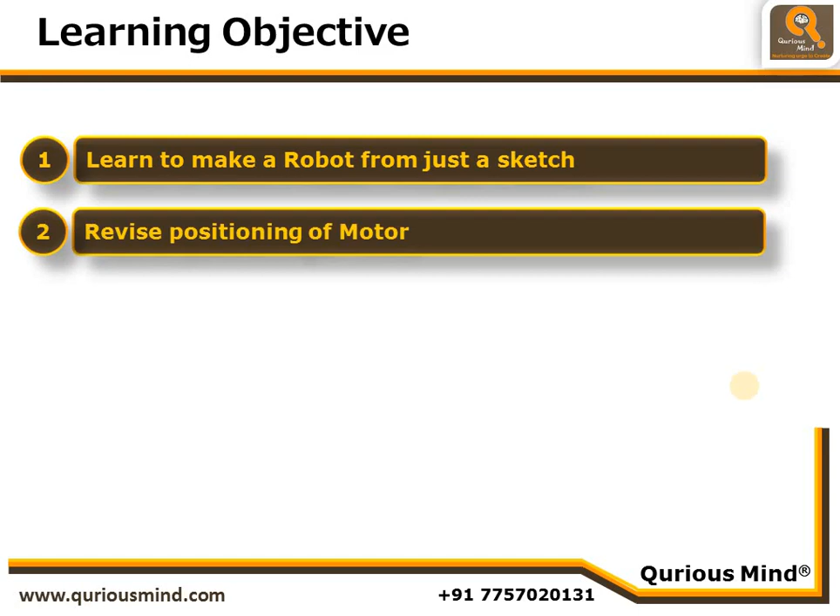So what are our objectives? Objectives are: learn to make a robot from just a sketch. That is one step closer to designing our own robot. The next objective, revise the positioning of the motor. We have learned how to position the motor. We are going to revise that in this video while making this robot. And the last objective is to revise the construction steps of oscillatory movement.

After you watch the sketch, pause the video, try to make your own robot. Do not operate it. Once you are finished with making a robot, start the video again, watch the construction steps, and then you may operate the robot.

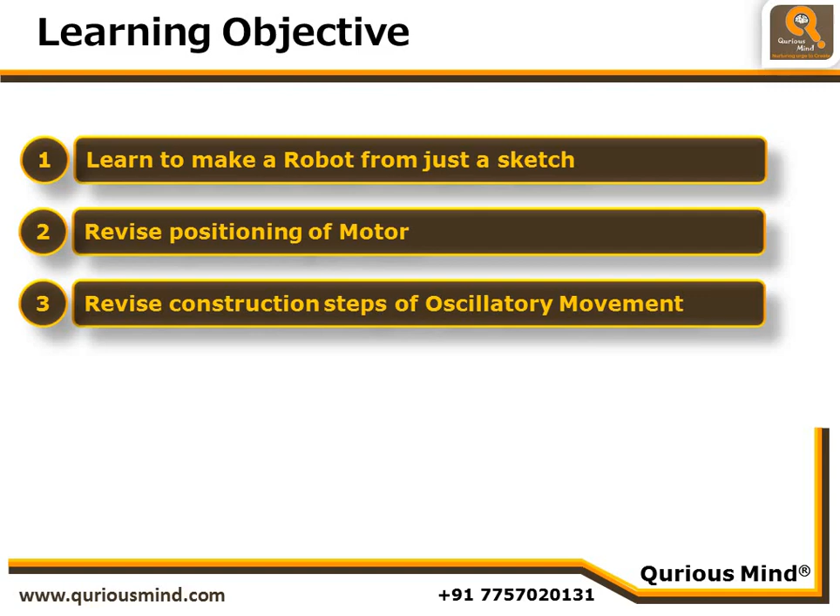So here is the sketch. Now here we see a picture. So this is a medium gear and this is a big gear. We see earth point here, and earth point is joining this pendulum rod using push-pull rod. Now we also have a pendulum point here. The pendulum point is at the center because seesaw should move up and down on both sides by equal distance.

This is the base of our robot and this is the mast on which we are attaching our motor and gears and things. So I hope you have understood the sketch, and now it's time to pause the video and make seesaw just looking at this sketch.

Please note that this is an oscillatory movement, so we have push-pull rod, earth point, sun point, pendulum rod and pendulum point. We know the joints are going to be loose while the pendulum point and the earth point are connected to the base very tightly. Make the robot. Once you make the robot, come back and start the video again and watch the construction steps.

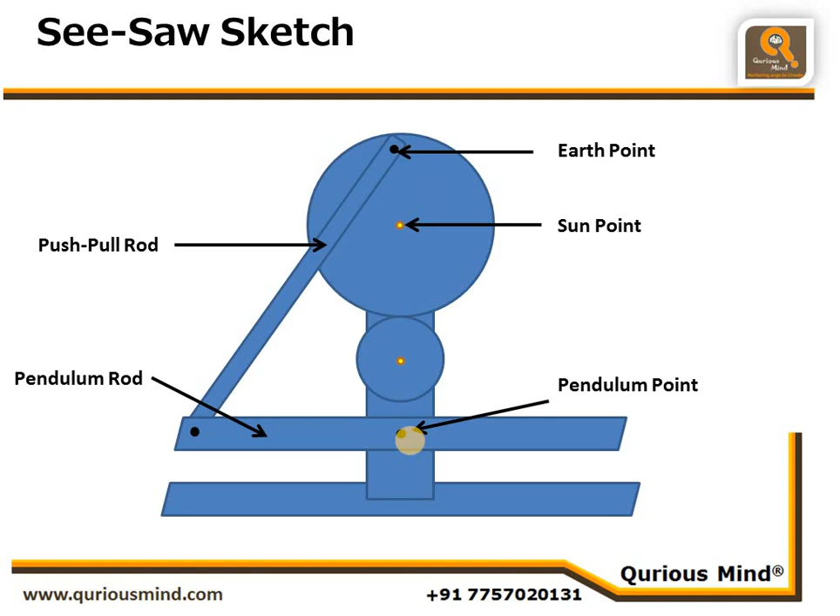This is step 1. For the base, we use C plate because it is stable. And on the C plate for a mast, we have used the L plate. So we have C plate, L plate, and they are joined using 2 nuts and bolts here. Then what we are doing is we are attaching the motor with the motor shaft. You can see the motor shaft is coming out from this middle vertical slit here, and the motor screws are attached, one in the middle vertical slit while the second one is in a horizontal slit.

Then we have attached one 1.5-inch bolt and tightened it up. This is our pendulum point, and we have inserted 2 spacers to make space. We have also put one shaft lock on the motor shaft to create space so that our gear is not going to get obstructed because of these motor screws.

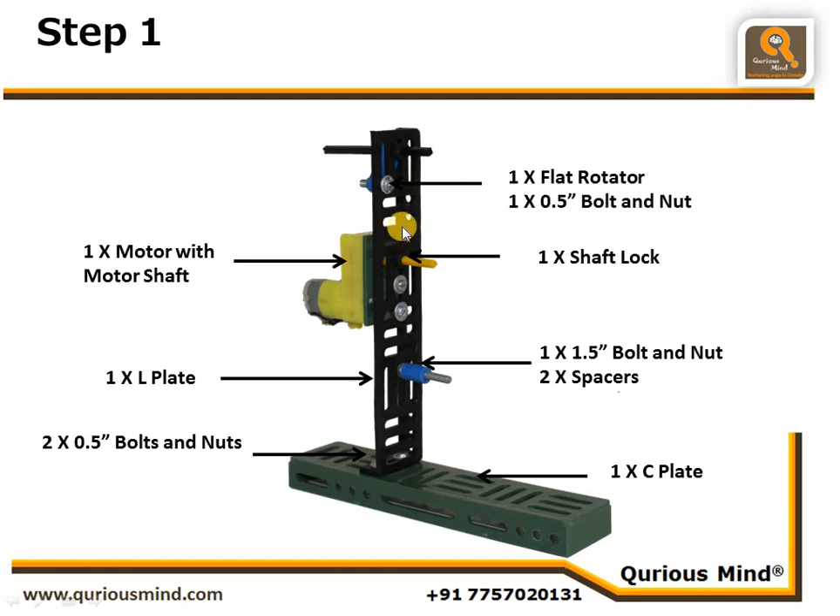Then we have attached a flat rotator here. This flat rotator is attached to make a hole so that we can hold this axle. And if you see, the flat rotator is in a slanted position. So the bolt is attached at the bottom here and the hole is somewhere here.

Now let's understand motor positioning. We want our gear which has the earth point to be at the top. So we take the gear which we want. In this case, we want the big gear. So we place it and its center at the top. Then we decide which gear we want to attach on the motor. And we have decided that it should be the medium gear.

So we connect the medium gear in such a way that they mesh each other. And then we see where the center of the gear aligns. And we see it aligns somewhere here. And that's how we decide this is our motor position. By having the gear which drives the assembly and the gear which is put on the motor side by side, we know where the motor position will come.

Through this hole which is created by the flat rotator, we have inserted a small axle and we have attached shaft locks on both ends of the L plate so that the axle is straight. It is not wobbling. Let's go to next step.

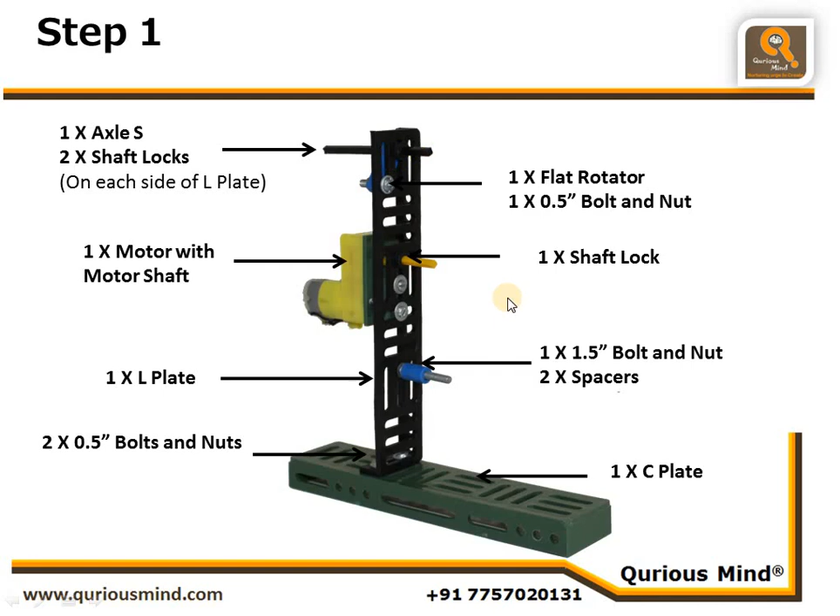In step 2, we are creating our gear B, which we will be putting on the axle in our last step. On that gear, we are creating the earth point. So this is our earth point. And we know earth point is tightened to the base. In this case, that is a gear, firmly.

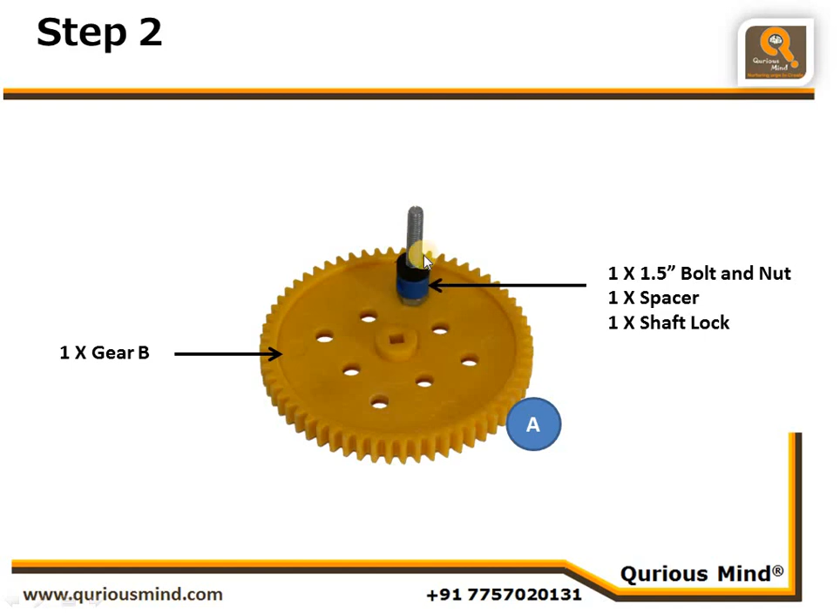And we have put one spacer and one shaft lock to create some space, because we are going to put our push-pull rod on this. And the push-pull rod should not touch our sun point. And that's the reason we have put a spacer and a shaft lock here. We are calling this assembly as assembly A. Let's go to the next step.

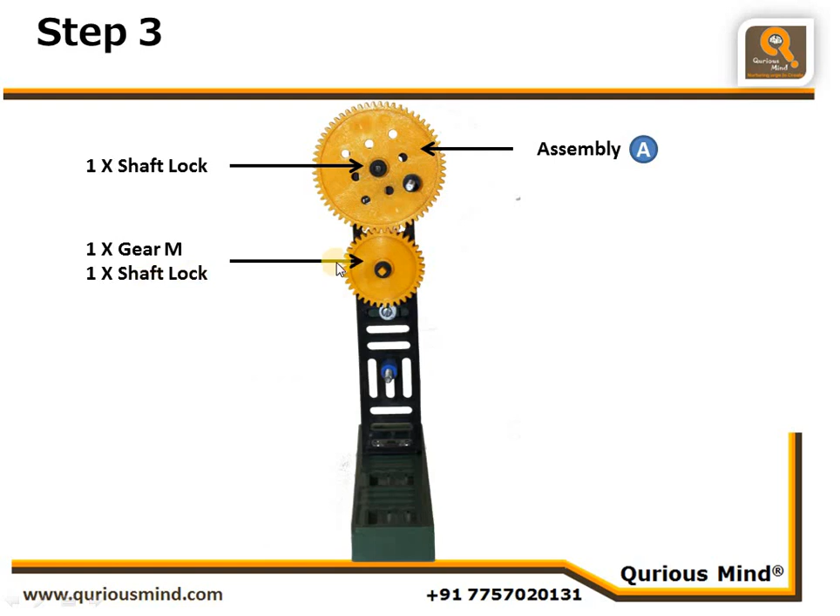In the next step, now we have mounted our assembly A, that is our gear, which we created in last step, on to the axle which we had created in first step. And then we have secured it with a shaft lock. We have put one medium gear onto the motor shaft and again secured it with a shaft lock. Let's go to the next step.

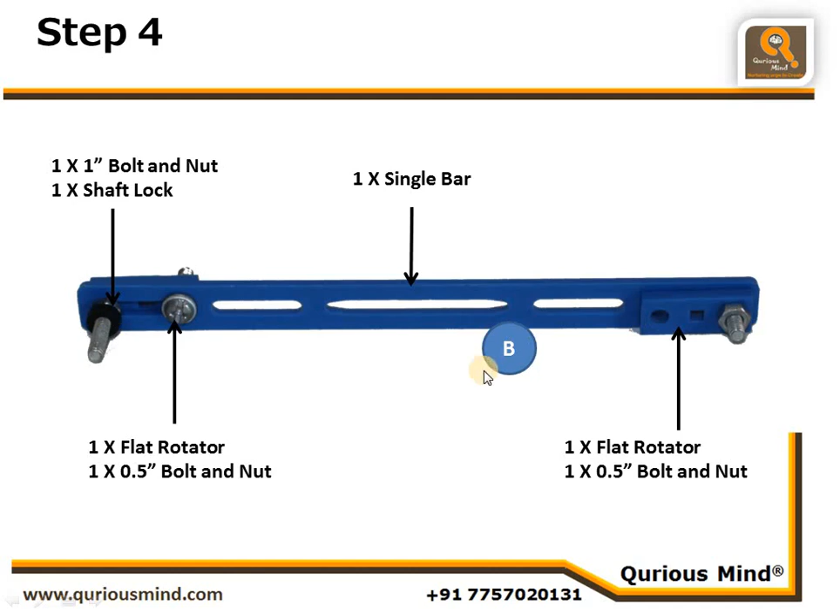In this hole which we created, we have attached one more 1-inch bolt. This bolt is going to be connected to the pendulum rod. This bolt is attached tightly, and we have put one shaft lock to create some space. This end will be attached onto the earth point. This we are calling as assembly B. Let's go to the next step.

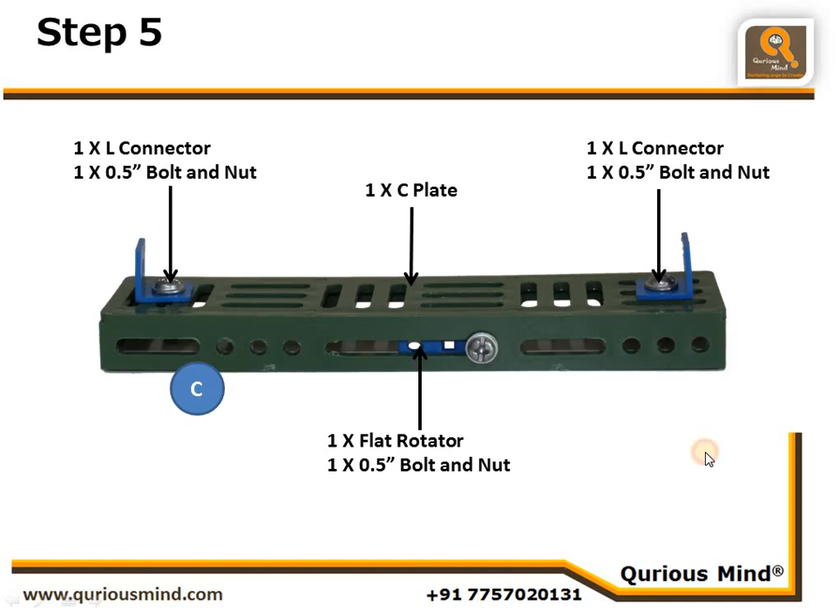So this is our assembly B, which we have connected using a nut to our earth point. This is loosely coupled because it's a joint. Okay, and this is our assembly C, which we have connected to the pendulum point using one nut, again loosely coupled because those are joints.

And now our assembly B and assembly C are joined here using another nut from inside the C plate, again loosely coupled because that's also joint. So these three are joints here. Assembly C, assembly B are mounted on the assemblies which we created in our step number 1 to 3. And that completes our seesaw. Now you can connect the wire and you can operate it.

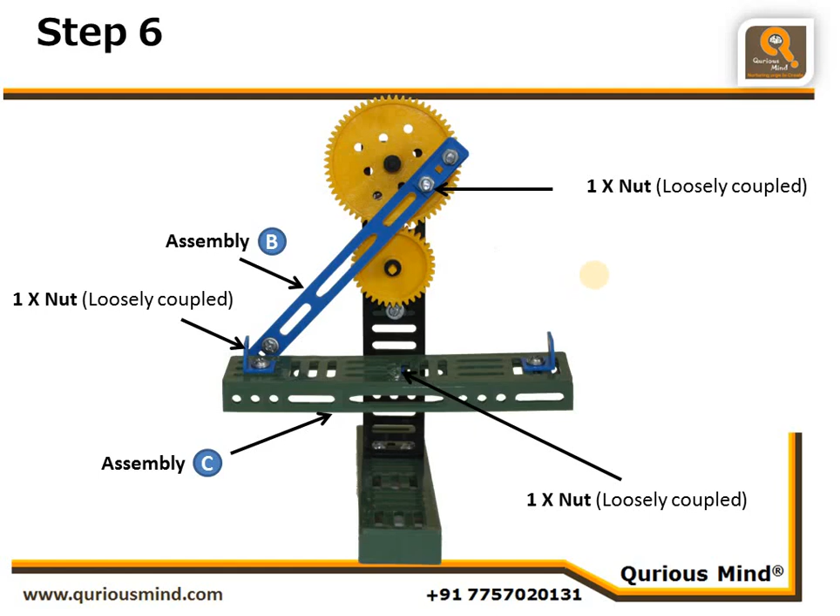So what did we learn? We learned to make a robot from just a sketch. We looked at sketch, we decided what components we need. For example, we know for the base we need C plate, for a mast we need L plate. So we used our understanding of our Qurious Spark Kit parts and used appropriate parts looking at the sketch.

We also revised positioning of the motor, where to position the motor based on where we want our assembly and what type of gears we are going to use. And we also revised construction steps of oscillatory movement. We saw 1, sun point, 2, earth point, 3, pendulum point, plus joining them we have push-pull rod and pendulum rod. So these 5 important things of oscillatory movement we have practiced once again.